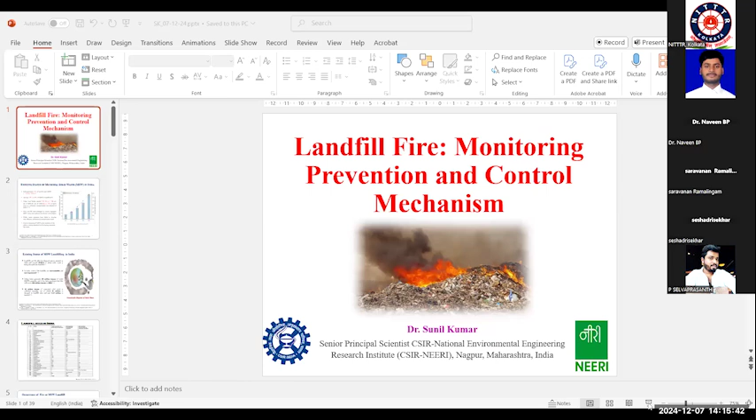Sir, you can go ahead. Okay. Thank you very much, Professor Naveen, for inviting me in this program. I think this is the last presentation, and I always get the last slot because I work in the landfill, and landfill is the ultimate disposal for solid waste management. That's why this is the last presentation.

I am presenting a piece of my work which we have carried out with the sponsorship from Department of Science and Technology, Government of India. In 2017, the Secretary of DST thought to carry out work on landfill fire, as no work has been reported on how landfill fire occurs and what the mechanisms are for its monitoring, prevention and control. So we worked exclusively on landfill fire monitoring, prevention and control, which I am going to present before all of you. Next one. Next one. Next slide.

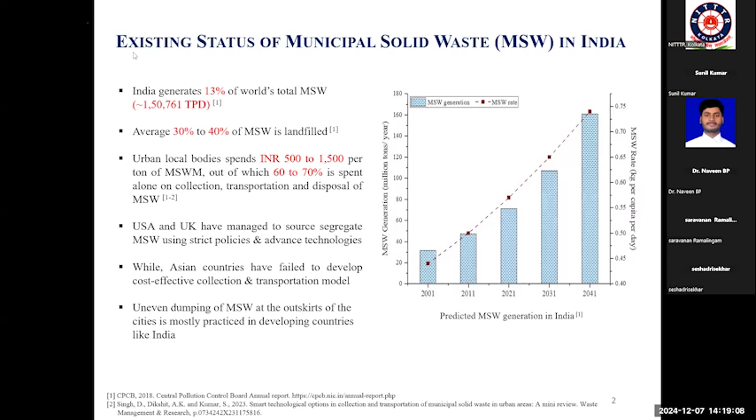If you see about the landfill, around 70 to 90% of urban solid waste is being dumped in the landfill, and most of the landfills are still non-scientific and non-engineered. And if you see among the total waste generated, 43 million tons of municipal solid waste are collected annually, and among them 31 million tons are still dumped in the landfill sites, and just 11.9 million tons is treated, which is also a question mark, as treatment efficiency is very low in our country. Next one.

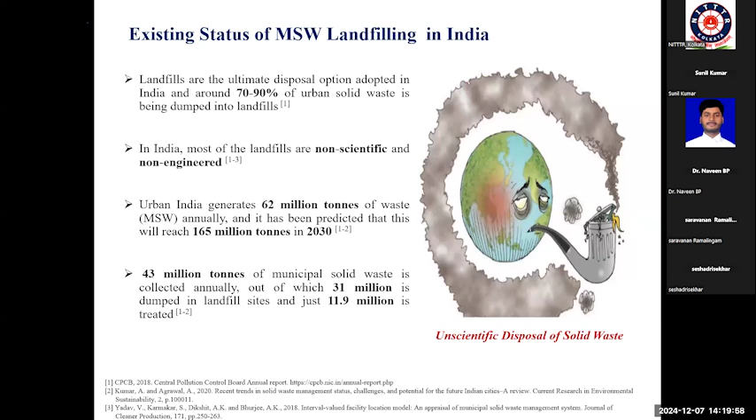These are the landfill sites. If you see, when I came in 2000 to NEERI while working, at that time, it was reported by Mr. Asnani that we have more than 10,000 dump sites across the country. If you can see in this figure, as per the report of the Central Pollution Control Board, still we have more than 3,184 dump sites across the country.

And there were a lot of initiatives taken by the Government of India through major funding, whether it is the National Urban Renewal Mission, the Jawaharlal Nehru Urban Renewal Mission, or Swachh Bharat Mission 1 and 2. And very few dump sites have been converted into partially engineered landfill sites; however, capping has started, and biomining is one of the major aspects of Swachh Bharat Mission 2. Thank you. Next one.

How the fire occurs. Landfill fire is a combustion process which is ongoing within the landfill, and it releases flammable gases, heat and smoke due to the decomposition of waste materials which are being dumped, whether freshly dumped, partially dumped, or dumped long back.

And this leads to frequent fires at the dump sites, and this is being reported several times, whether it is Mumbai, Delhi, Cochin, Punjab, Northeast, Bangalore, throughout the country, which is significantly impacting the surrounding environment and human health. In Mumbai there is one big dump site, Deonar, and in Delhi, Ghazipur and Okhla, and these are the most reported landfill fires in our country.

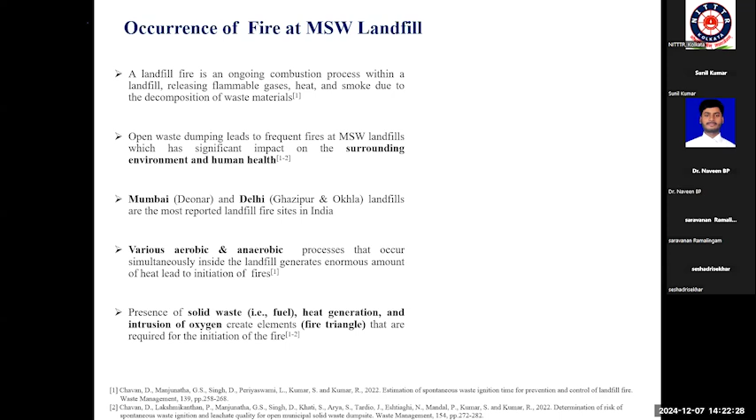Next one. You can refer to these two papers. These are the only papers in our country which will give you the fundamentals about how you can estimate spontaneous waste ignition at dump sites towards prevention and control of landfill fires, and how to determine risks of spontaneous waste ignition and the leachate quality for open dump sites, which are published in the Waste Management Journal. Next one.

These are the problems associated with landfill fire. Landfill fire has several problems. Air pollution is one of the major aspects. Groundwater pollution, loss of lives. In Ghazipur, I think 4 or 5 years back, 4 or 5 people died. In Sri Lanka, a severe fire occurred along with slippage of dump sites. Around 42 people died, in spite of the festive season. At that season, people were out of the dump sites.

And long-term health impacts. This is one of the important aspects which needs to be considered by the policymakers: the health of the people who stay surrounding the dump sites, as well as the workers who stay at the dump sites. Also, it migrates, and due to wind and other factors, several people are impacted with health concerns due to landfill fire. Next one.

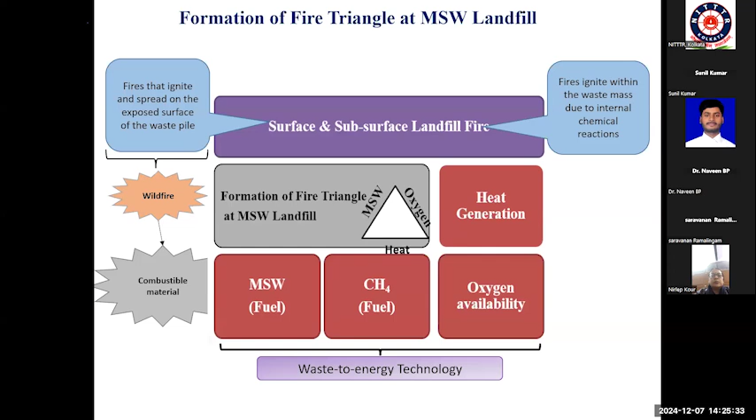The causes of landfill fire. Improper segregation. We have rules in place since 2000, after the Surat plague. A lot of efforts towards policy formulation took place in our country, and there was a deadline that we have to segregate the waste by this period. Similarly, in the 2016 rules it was also highlighted, but we are unable to segregate. So with improper segregation of waste, whether it is the presence of batteries, chemicals, or aerosols, fire takes place.

Smoking by rag pickers is also one of the important aspects. And although fires take place throughout the world, in the US a lot of fires, they can control them easily. Here, a fire management system is not available. We don't have any basic infrastructure at the dump site, so how can we think of a fire management system? Site characteristics also play a role. Climate is also one of the factors. Biological and chemical degradation generate heat, and waste ignition is initiated.

The risk posed by landfill fire is very high in India, as most of the landfills are non-engineered, and being a tropical climate, fire takes place very easily, particularly in April and May. Next one.

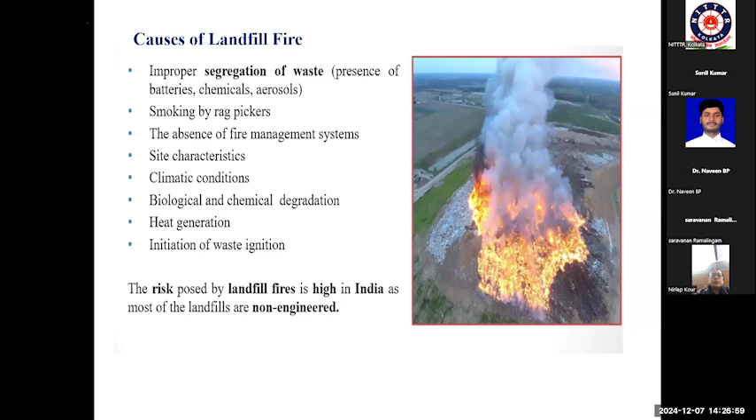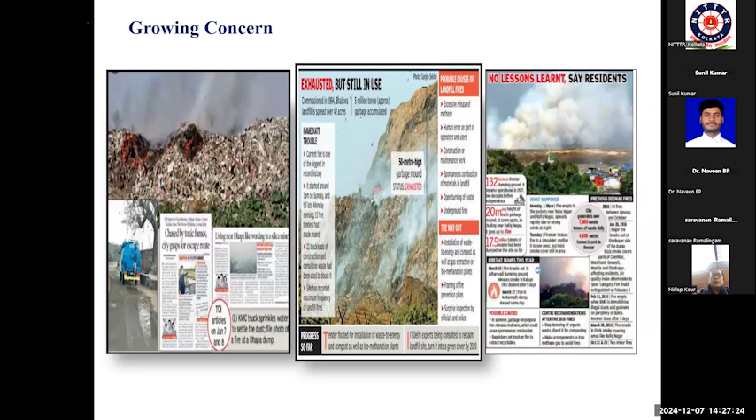This is a growing concern. You can see a lot of things have been reported in newspaper cuttings, whether it is Mumbai, Cochin, or Nagpur. In Cochin, there was an intense fire last year. A lot of efforts were taken. Still, it went on for around a month. Next one.

Now, the types of landfill fire, I have already told: surface fire and subsurface fire. Surface fire occurs on the landfill surface, and is accidental and also intentional. It is done intentionally, politically motivated also. Surface fires are easily detected and monitored. But if not controlled, it becomes more intense and hazardous.

Coming to subsurface fires, they occur inside the landfill structure, due to heat generation inside the subsurface from biological and chemical reactions, and are very difficult to detect and monitor. And if not controlled in time, it might propagate across the landfill, and it will be very difficult to control. Next one.

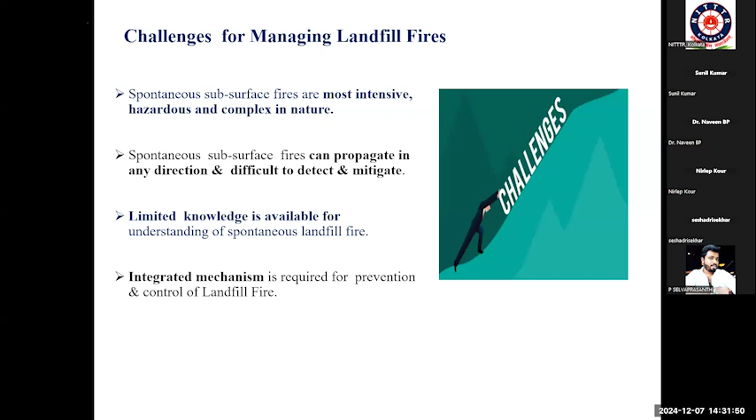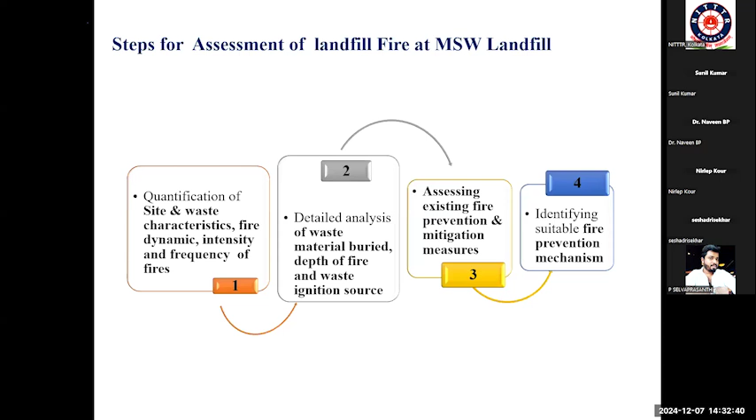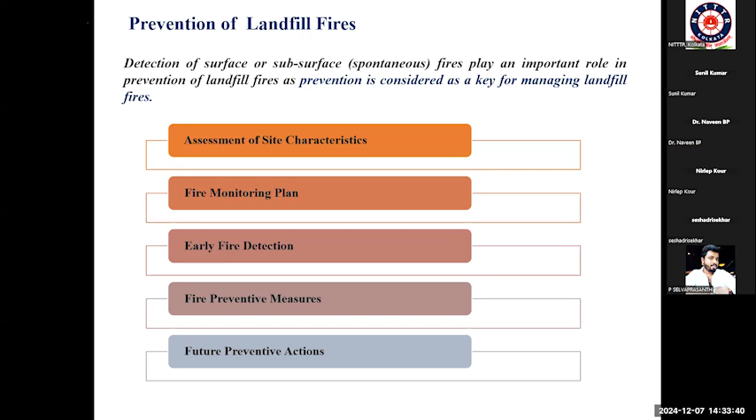Coming to the first point, assessment of site characteristics. What are the types of waste? Waste receiving capacity: what is the capacity, how much has been dumped, how much is being dumped per day, and what are the future plans? Waste composition: what types of wastes are being deposited, its composition, topography, slopes, age, ambient temperature, rainfall. These aspects should be examined for assessing landfill site potential for occurrence of landfill fires.

Wind and weather is also very important. It can increase the health hazards for firefighters operating on the fire ground, whether in hot climate or cold climate, and it can directly affect the propagation of fire. The frequency of spontaneous smoldering and fire events at dump sites is more prominent particularly during the pre-monsoon season, when the temperature is elevated. Next one.

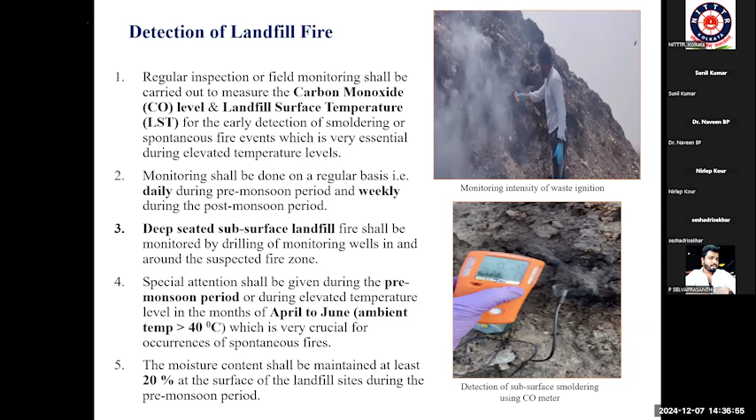The moisture content. This is also one of the important aspects. Maintaining moisture content of at least 20% on the surface of the dump sites during the pre-monsoon season is very much necessary, and this can prevent the landfill fire. Next one.

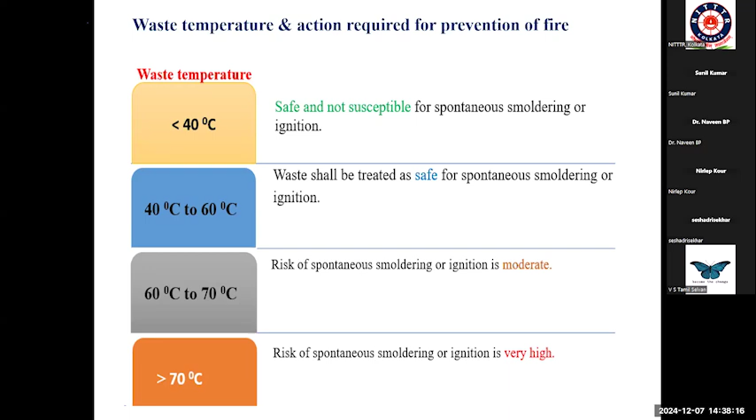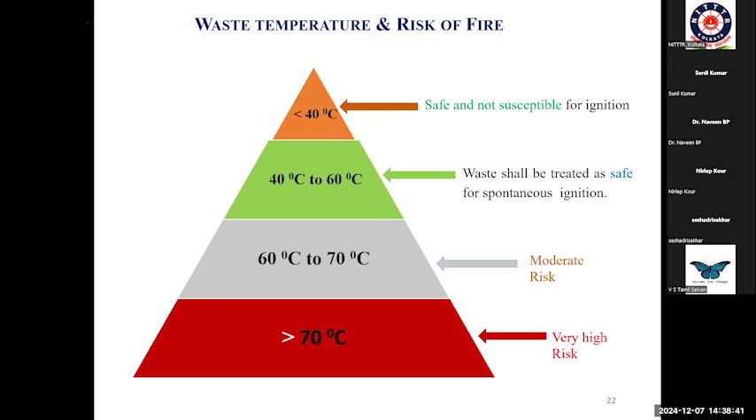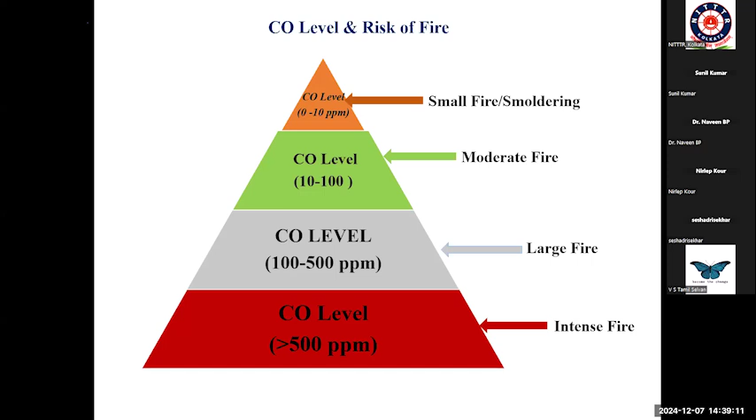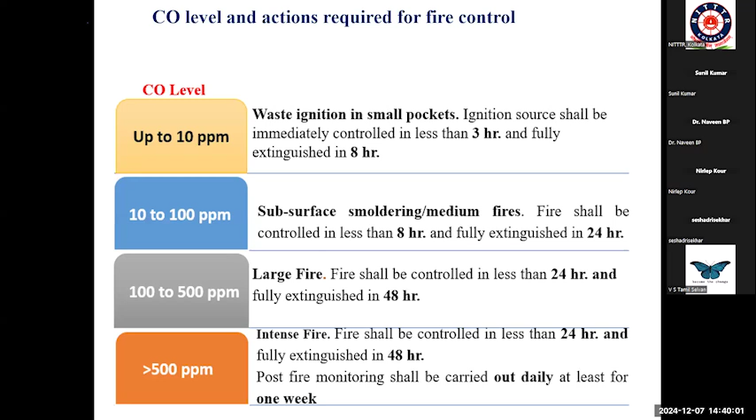So from the lab study, we have some findings. The first finding is old waste has high ignition potential as compared to fresh waste. It was also observed that heat generation from waste depends majorly on the percentage of carbohydrate present in waste, not on the organic component. People usually think that the organic component is what matters, but the percentage of carbohydrate is directly related to the heat generation.

Lignocellulosic biomass present in the organic waste fraction is responsible for higher landfill gas generation, and the pre-monsoon season, April to June, is very crucial. So waste diversion or segregation programs might help for effective prevention and control. Leachate can also be used for the control of waste fires at municipal solid waste dump sites. Next one.

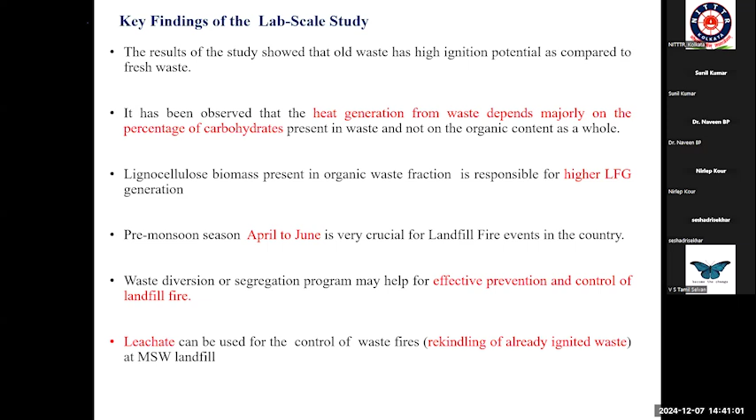Next, just press. This is waste category and risk. Among all these fresh, partially degraded, and old waste, depending on month: 0 to 15 days, 1 to 3 months, 6 to 12 months, and more than 12 months. What are the risk of fire? If it is fresh waste, low risk is there. Similarly, for partially degraded waste, moderate, and for degraded waste, it is high.

And if it is more than 12 months, it is very high. The risk is very high. So waste category and risk of fire has been shown in this slide. Next one.

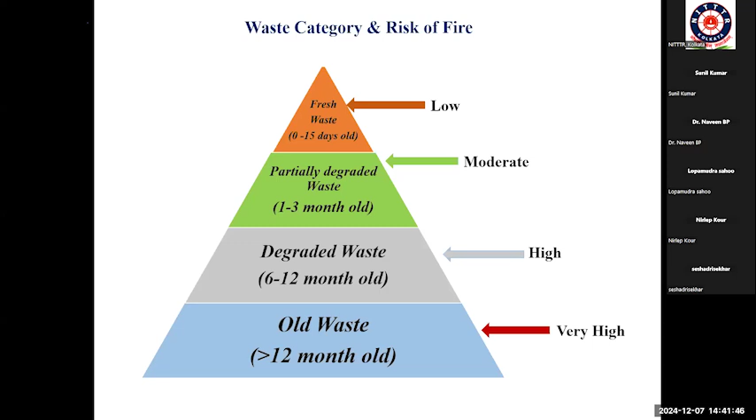So we have carried out field study, and what are the findings? The early detection and application of suitable prevention control methods are the key things for successful landfill fire control. High carbon monoxide concentration and landfill surface temperature were observed during pre-monsoon, which leads to major fire. Negligible CO level, but high landfill surface temperature was observed during post-monsoon, which indicates minor subsurface smoldering events took place in post-monsoon season also.

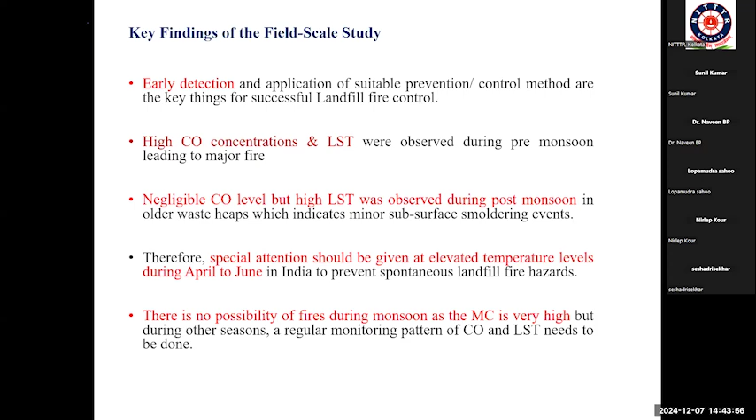Therefore, elevated temperature zones can be identified, and then preventive measures can be taken. There is no possibility of fire during monsoon as the moisture content is very high, but during other seasons, regular monitoring of CO and LST needs to be carried out. Next one.

New observation is indicators of fire prone. What are the indicators which will indicate you these are the fire prone municipal solid waste dumps? If landfill surface temperature is increasing, LFG temperature is increasing, less moisture content is being observed in the dumped waste, and CO level is increasing, as well as the quality of leachate, that is darker leachate with a strong deterioration in leachate quality. These are the indicators for fire prone municipal solid waste dump sites.

Methods for detection of spontaneous fire: landfill gas temperature should be monitored, CO, leachate composition, and thermography study. These are the methods for detection of a spontaneous fire. Next one.

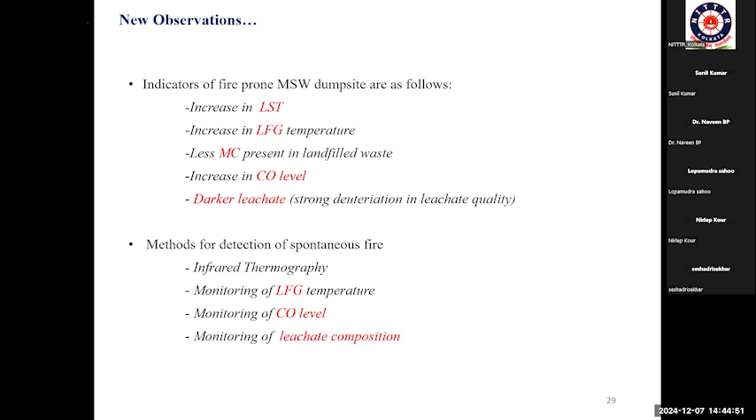Coming to the determination of landfill gas generation potential of waste based on lignocellulosic biomass, we have identified the landfill gas temperature, and this study has been published in Science of the Total Environment. Based on the batch scale study, fresh waste was having higher potential of landfill gas generation, around 31,660 milliliter of methane per gram of volatile solid were observed, and this indicates the landfill gas generation potential of the lignocellulosic biomass component. Next one.

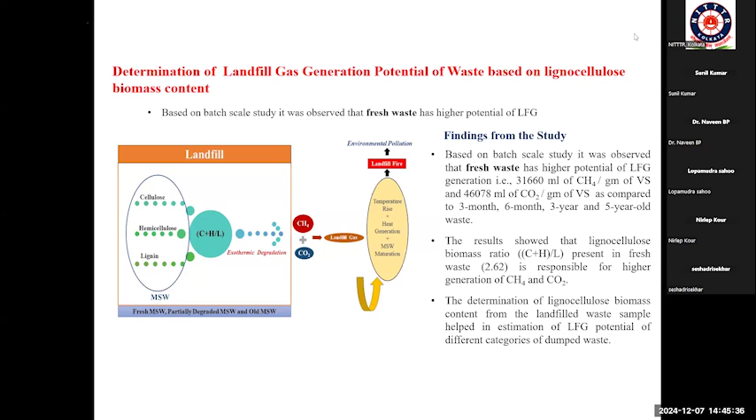What are the problems associated with municipal solid waste landfills and need for cost-effective biocover? Biocover is one of the important aspects. You see, sometimes in a very haphazard way, biomining activities are going on, and the bioearth which is coming out has great potential in reducing the landfill gas. So it is very important towards landfill fire prevention.

So a huge amount of bioearth material is accumulating at MSW dump sites, where biomining plants are operational for the treatment of legacy waste, and bioearth, which is derived from old waste fine soil, has potential to oxidize methane. Due to climate change and sustainable development goals, methane oxidation is very much necessary, as its product has very less global warming potential as compared to methane.

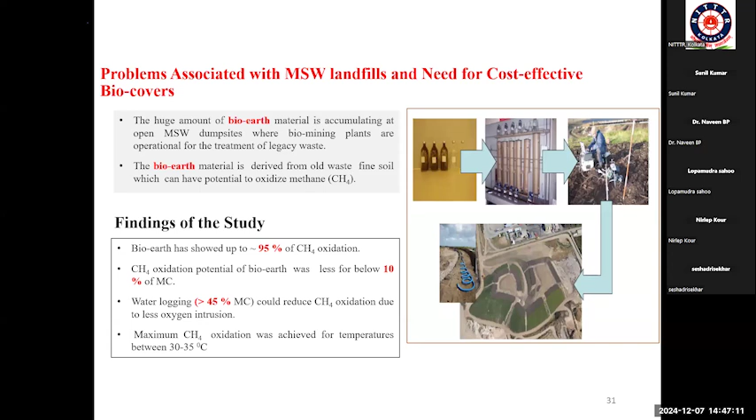So, application potential: there should always be a short-term and a long-term plan. For the short-term plan, a standard operating procedure and short-term action plan should be formulated for immediate prevention and control of landfill fire at any dump sites.

For the long-term one, we should go for monitoring of LST and CO level continuously, so that hotspots can be identified and then prevention and control measures can be taken. And understanding of the fire, fresh and old waste composition and its thermal properties is necessary, which will help in long-term fire prevention plan development. Next one.

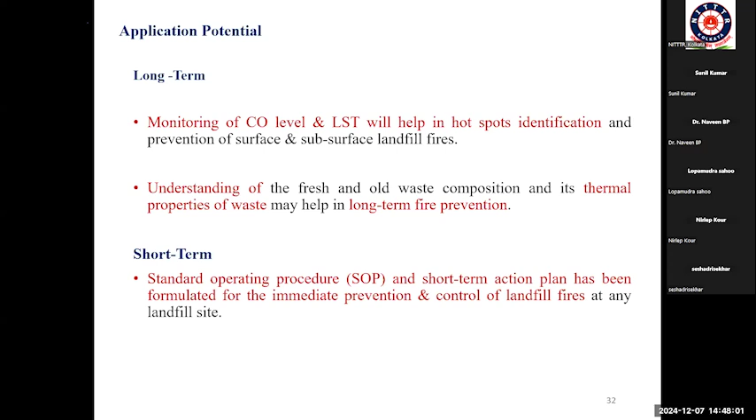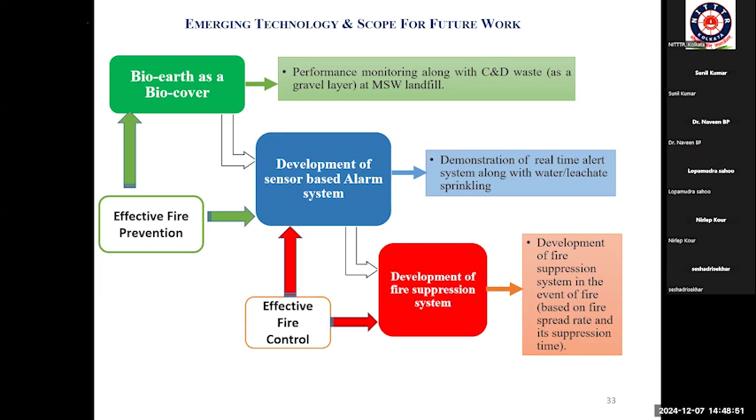These are the future research works which researchers should take up for its control, as well as this online monitoring system. Next one. I have elaborated about this in the next slides.

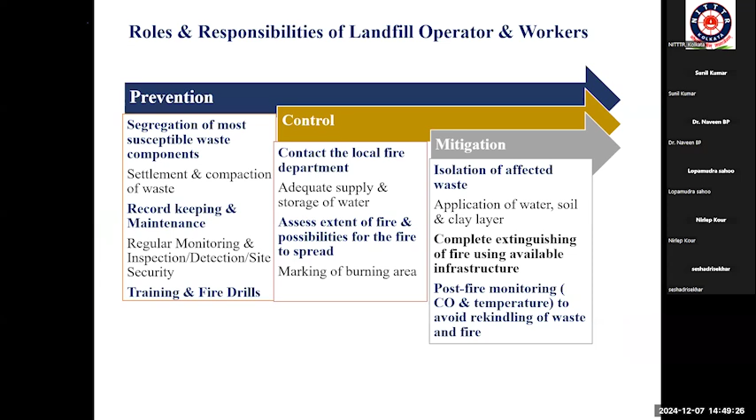And we have identified roles and responsibilities of landfill operators and workers, and we have carried out this capacity building program for many municipal corporations: what are the prevention, control, and how it can be mitigated, which I told you previously. Prevention, control, and mitigation are very much necessary for landfill operators and workers who are working at the dump site. Next.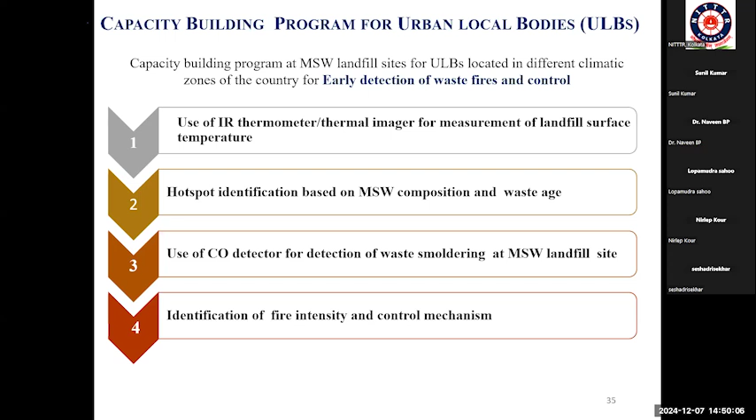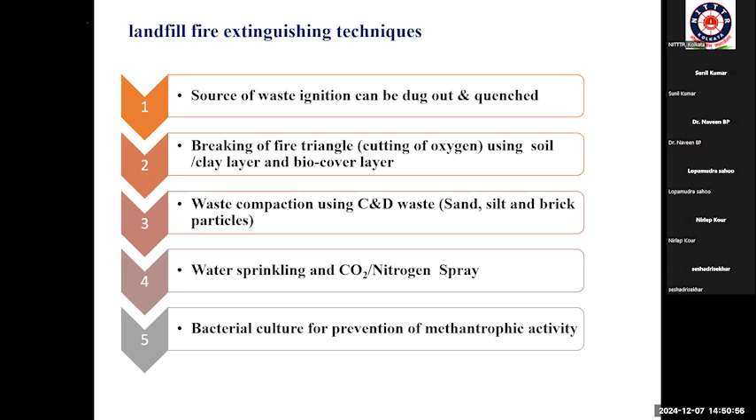This is also required, and we have to break the fire triangle, cutting off oxygen introduction by using a soil clay layer as well as biocover. These are necessary things by which fire extinguishing techniques can be adopted. Next one.

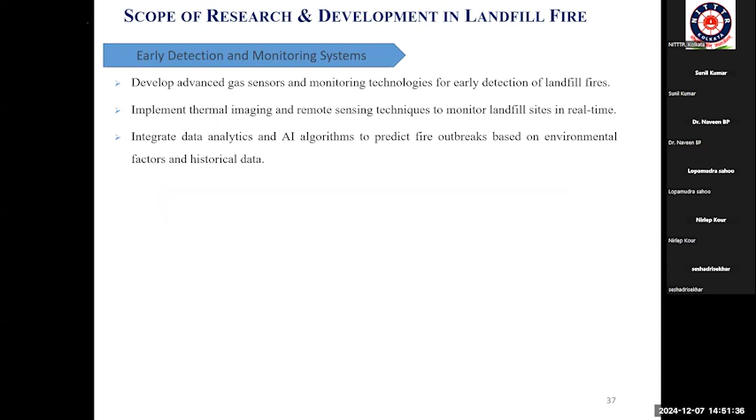Next point is fire suppression and control methods: techniques specifically tailored for landfill fires, and investigation into the use of foam injection to smother fires and reduce oxygen availability. These are also research areas which should be investigated by young researchers. Next one. This I showed in the figure. Next one. Next slide.